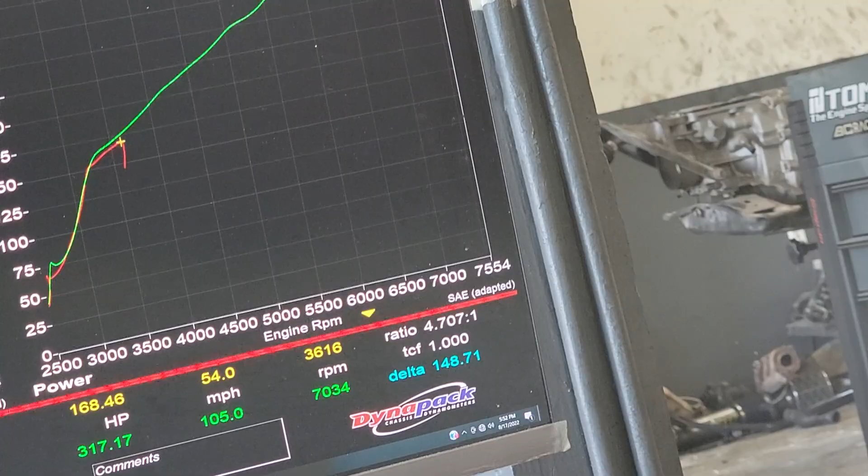What's up, guys? I have this 2016, 15 or 16 370Z. It's a 7-speed, has a UPT E85 kit, 3-inch intakes, and headers. We are at 317 wheel. Let's see how much we can get out of it.

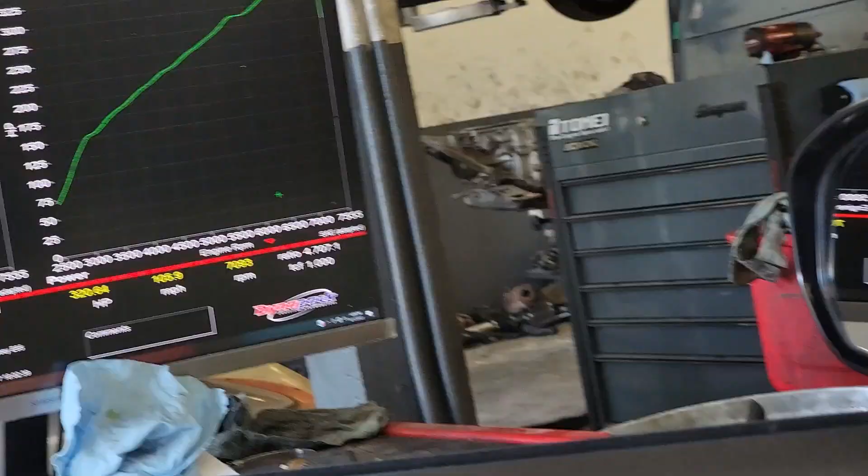So normally, if you have headers and E85 and 3-inch intakes on our dyno, the car should hit 320 on our dyno, maybe 323, 324. Alright guys, and just as expected, 320 wheel horsepower, 257 torque. Torque normally sometimes a little more, the 260s, but that's okay.

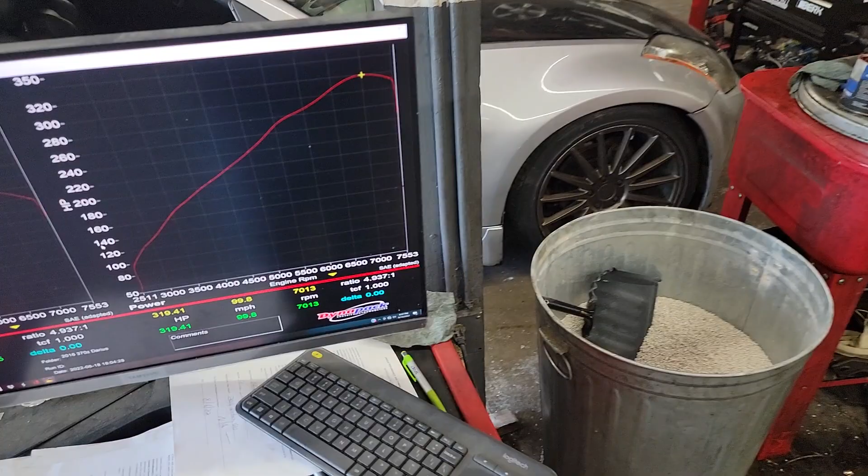Alright guys, so that 370Z I was tuning was on E85, headers, test pipes, exhaust. And the last one I did, if I can put the clips together in one video, I think it made 325 or something like that, 324. So see, I was telling you in the other video that it makes around 320 roughly on our dyno with those type of mods, E85, headers, intakes, exhaust.

So here's another example of basically the same parts, but it's just a different motor. So this is what this one made, and it's still really hot in here, but it's actually not as hot as when I tuned the other car that made a little bit more than this one. So it's actually slightly cooler compared to the other one. And there goes the owner. There he goes. So yeah, you can see every motor is different.

What's up guys, I have this 09 370Z manual, 6-speed, currently tuned by somebody else. I always forget, like Lancaster, Palmdale, I don't know, they're two totally separate areas. Maybe I should have looked at the map.

But one of those cars running pretty bad as usual, and this is a new owner, and the previous owner, I know who you are, and I think other people know who you are. I think you lied to this guy. You told them that I tuned it, but I didn't. So I talked to the new owner on the phone, and I just double checked anyways, just in case. I tuned so many cars, but no, I didn't have anything that I tuned this car on my laptop. And then as soon as I told him that, I think he contacted the previous owner, and then he finally told him that no, it was not tuned by Saul, it was tuned by somebody else. So that's why it doesn't run good.

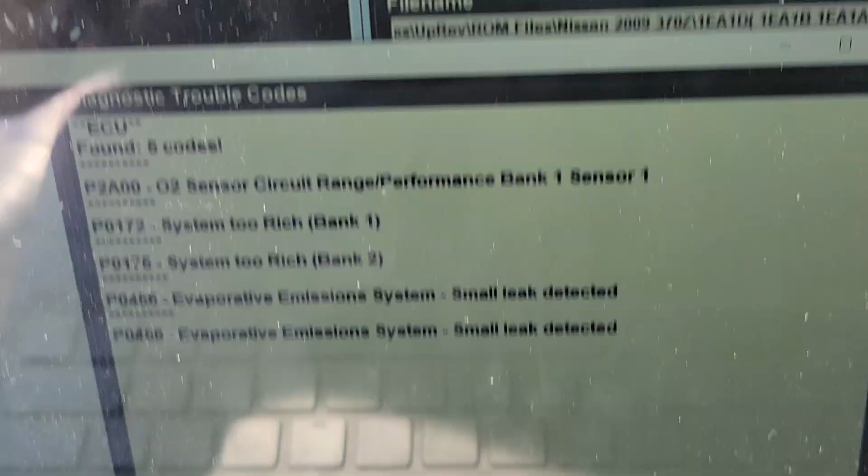And yeah, throwing some codes, need to fix those. Yeah, they're all tune related except for two.

Alright guys, so on this 370Z, the 09, everything seems to be good for the most part. The idle is perfect, it starts every single time now, no problems. It doesn't smell really bad how it did with the other person's tune or attempt to tune. What I am seeing a lot of is knock on the log, an extreme amount, just way over nothing normal. Basically it's almost maxed out. The knock sensor cannot even read anymore. It's almost to the point, it's like 99% maxed out through the readings. So the motor may already be damaged from the other person's tune. So that's why you have to go to someone that actually knows what they're doing.

So yeah, this is gonna be like a super safe tune, and this guy just wants his car running. I'm gonna let him know that the motor is probably already damaged, so he should start probably saving up for another motor. But now that I'm putting the tune in here, it should last him a while. Just I don't know when. Hopefully if he doesn't beat on it, it might last him even longer. That sounds kind of funny, huh? You don't beat on it, it'll last longer. But yeah, so hey, at least he's gonna get his car back. But he bought it already tuned like that from someone else, and they had told him it was from me, but it's not, so that kind of sucks for him. So he didn't know it was tuned by somebody else, but hey, everything works good.

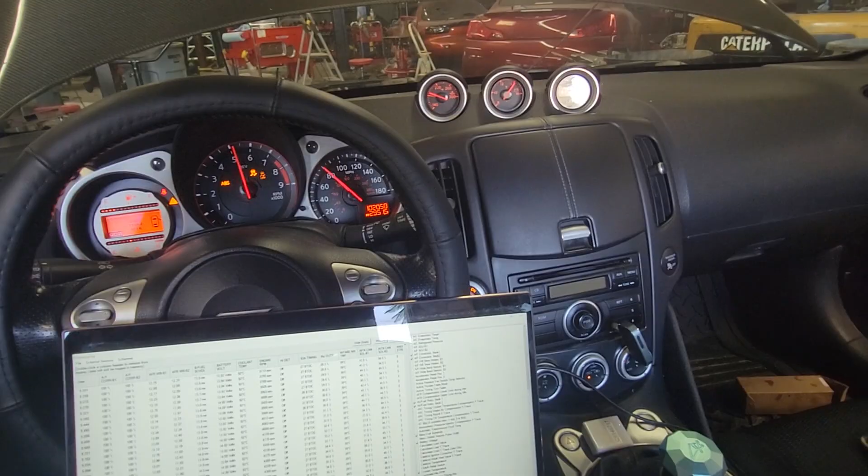Alright guys, and this one is about done. Let's do another pull.

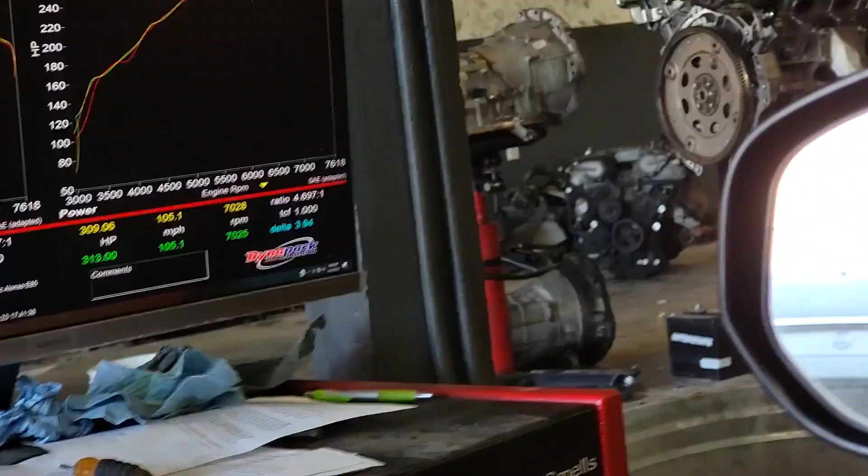This one, the intakes - I think I said I didn't know what they were at first because I was inside the car. They're still Gen 3 intakes.

And 313, very good, very very good. It's really hot in here, everyone's sweating as always, super hot. So very, very good. He's not here yet, he should be here soon, the customer, and then I'll let him know. I guess he said he's out doing errands. So yeah, it's already done - when he comes back, he just test drives it and goes home.

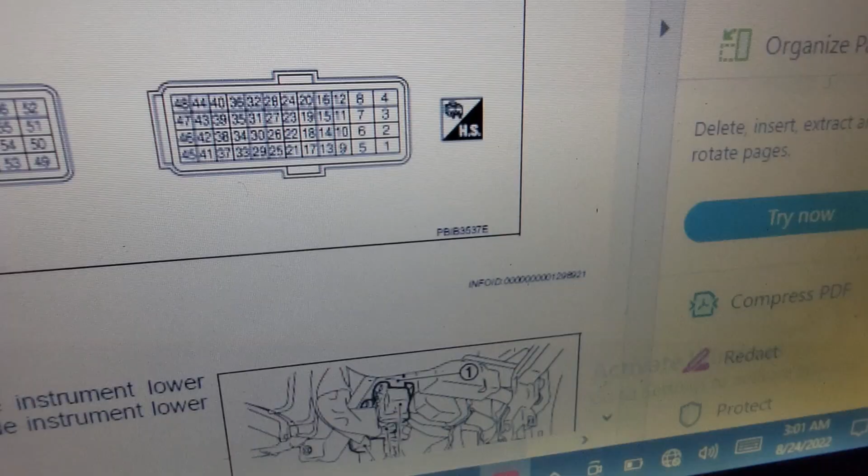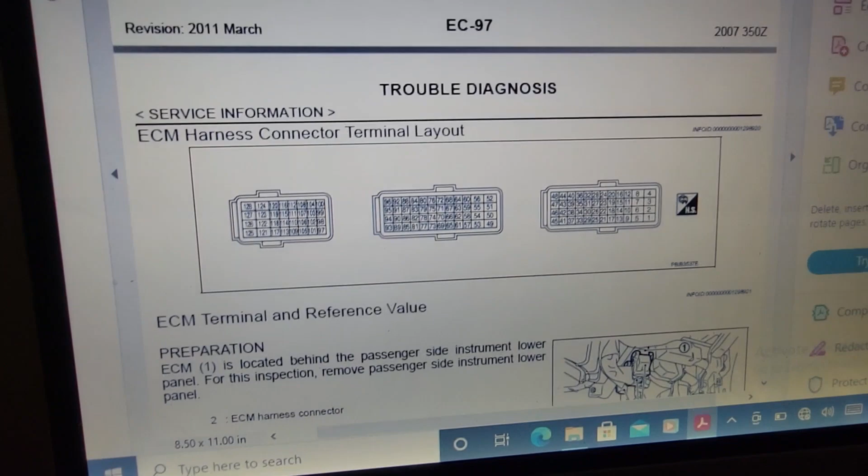What's up guys, so you can see it is 3:01 a.m., and texting Fresh Kicks, and I found the problem for his car. He keeps messaging me right now. So I gave him another ECU, and his car started.

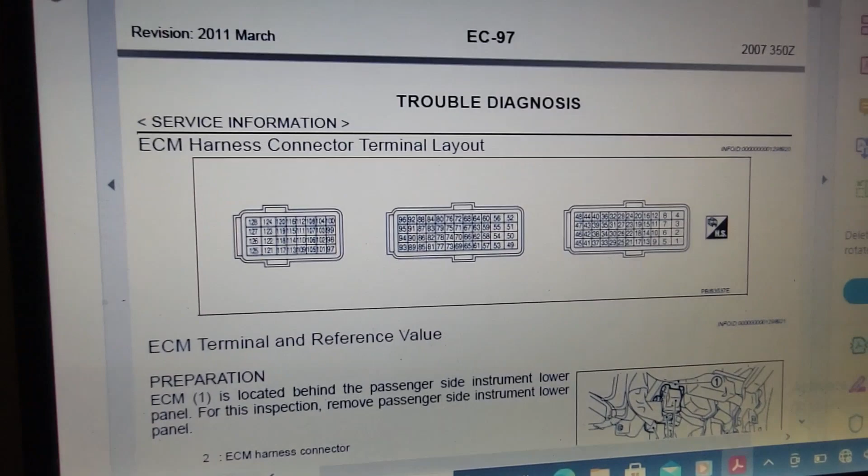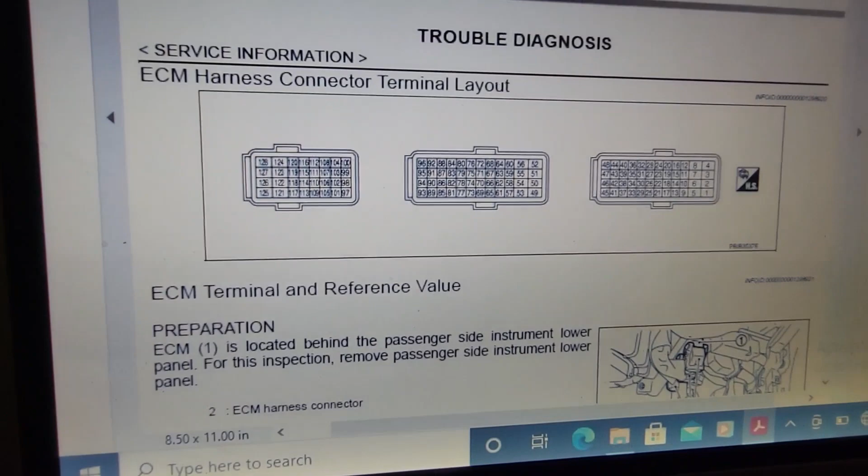So here's the thing, let's start from the beginning. He had some weird throttle issues, and then we tried another computer and it had the same problem, so of course you're gonna cross it off the list that it's the ECU that malfunctioned. Well, his car finally stopped turning on, so we just decided to try another ECU anyways after that, and the car started. So he put back the original ECU and the car did not start. So we put back the other ECU and the car started again. So therefore the original ECU is no good.

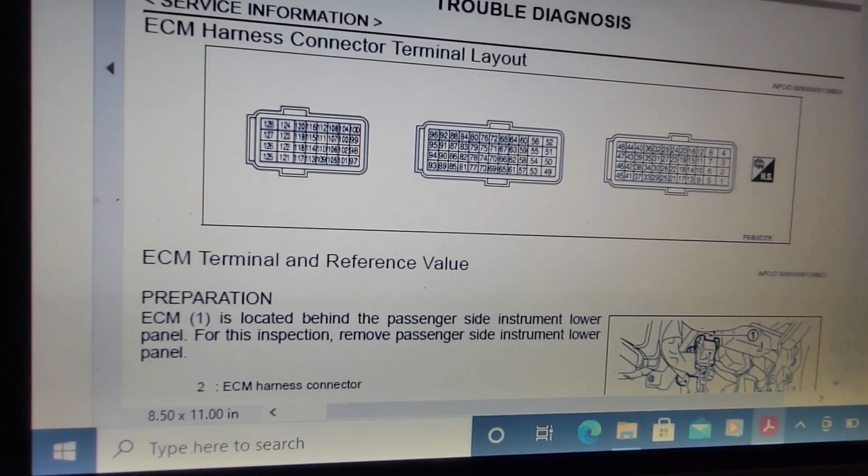I never looked at it physically, he was the one taking the ECU on and off. He was driving the car today testing it out, and then it's 3am and I'm at home and I want to see if his ECU still turns on, connects, you know. And it did, and it told me the license is still in there, so it's still making some sort of contact.

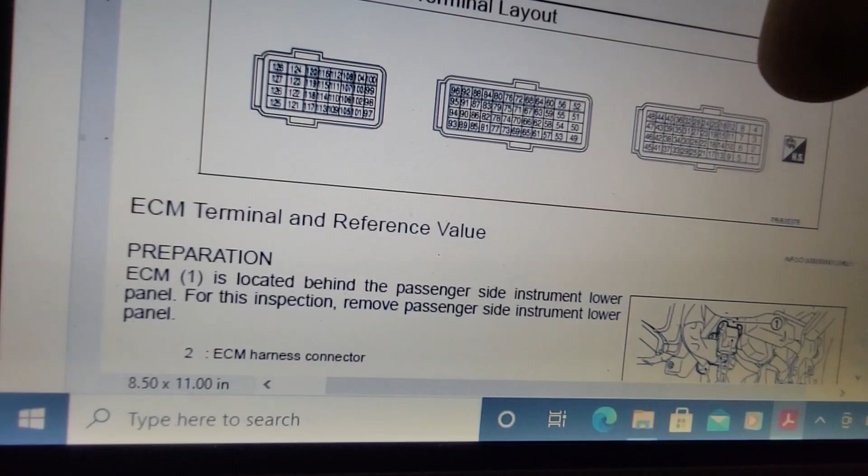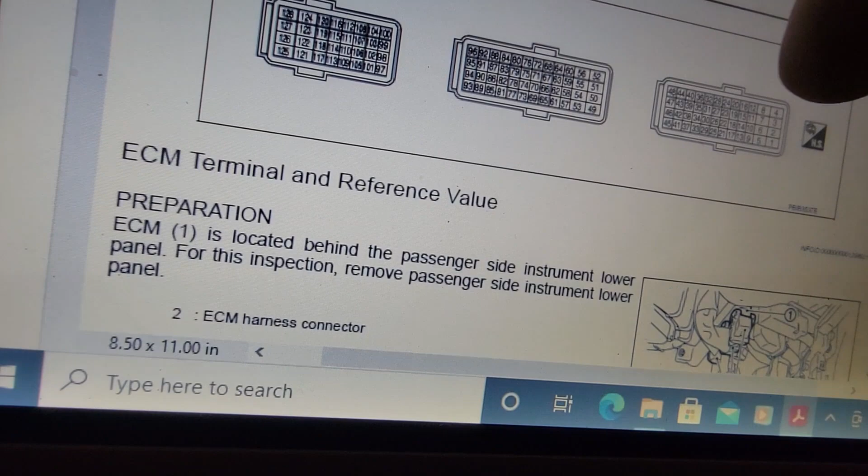So I unplugged the ECU from a harness I made so I could check it out of the car, and all the pins that have to do with the throttle, and a couple extra ones, are extremely corroded, like really badly. It can be caused by that big starter wire that throws a lot of voltage, and it was just swinging and it kept shorting out, so it would send a signal back to specific pins, and that's probably what happened.

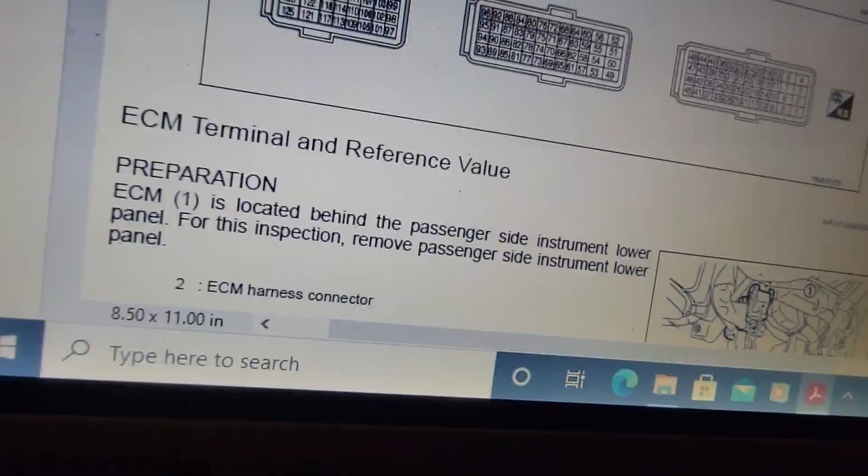But I also feel like inside the ECU it was already slightly corroded as well. So I'm gonna see if I can somehow show you guys what it looks like. So there you go, all that corrosion right there looks like battery acid on there, just like on your terminals. These are all the throttle pinouts and a couple extra other different things as well.

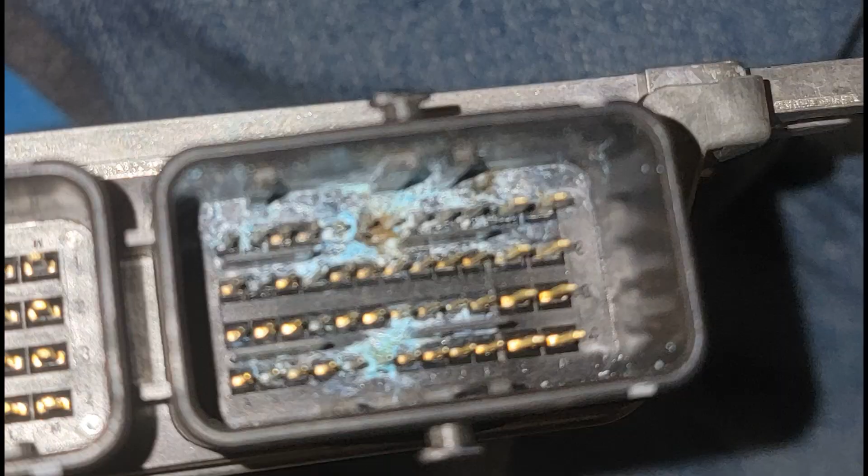What's up guys, I have yet another retune. I have another car on the dyno right now.

This one, in a previous clip, I don't remember if I said where it was tuned from. It's tuned from somewhere in Whittier, and the car was having problems. It actually had two problems: one was the tune by the other person who tuned it, and the other issue was an actual part on the car, a sensor that needed to be changed.

So how do we know the tune was also causing the problem if the part was changed? Well, the customer brought the car over and it was making popping noises, like timing noises, not like a crackle map or a pop map. The car only has one map, so it's a performance map, and as soon as you turn it on it was basically backfiring, popping from the intake, so obviously that's not good.

I put a startup tune, because it does have different injectors and it's on E85. I made a file real quick, and the popping went away instantly, and you can actually rev it freely all the way to redline. You couldn't do that before with the other person's tune.

After that it was throwing a check engine light for the exhaust cam sensors, so George replaced them, and now they read, so everything's good.